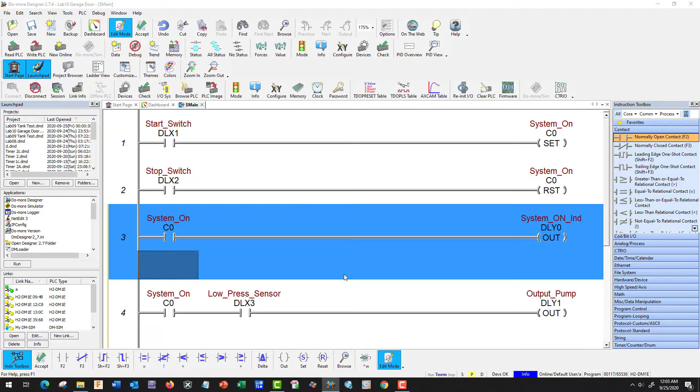Okay, so that's our output pump. So let's just document that. Tools, comment editor. Okay, this is going to be our output pump. That just helps us identify this, and other people following behind us could do it.

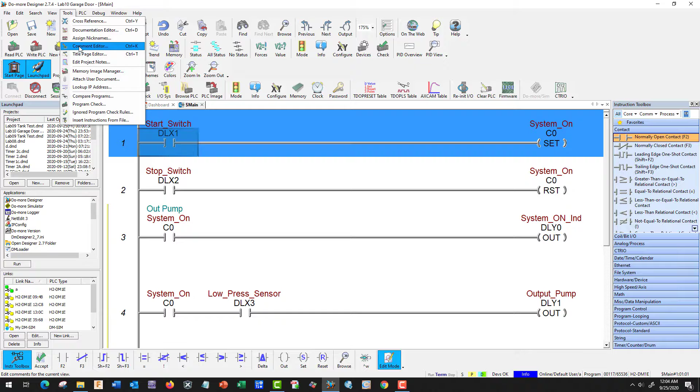Alright, and maybe we'll go ahead and just put a comment above this one. Tools, comment editor. I'll just put system on. Good. Alright, let's go take care of our

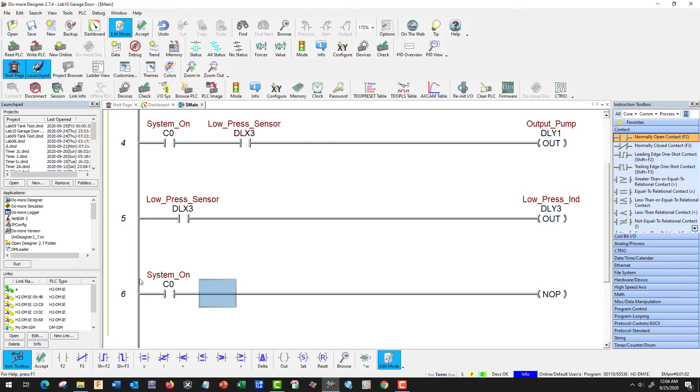input pump. Alrighty, so our input pump should come on if the system coil is running and the tank low level sensor is on. Okay, so let's do our C0 system coil, and we need the low level sensor, which is DLX4. And if you notice, all the inputs are X's and the outputs are Y's. Low level sensor, good. And we're going to turn on our input pump, which is DLY2. And it should be populated with an input pump.

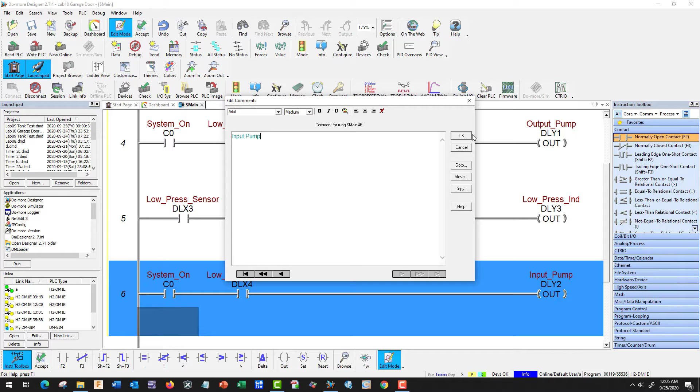Okay, so why don't we just document that too. Okay, beautiful. Okay, so it should stay on until the water level reaches the high level sensor. So let's go ahead, and if the system's on, the low level sensor's off, let's just go ahead and kill it when we get a high level sensor. DLX5, high level sensor.

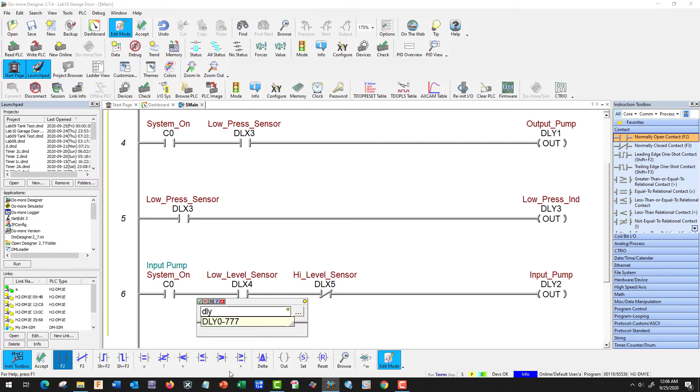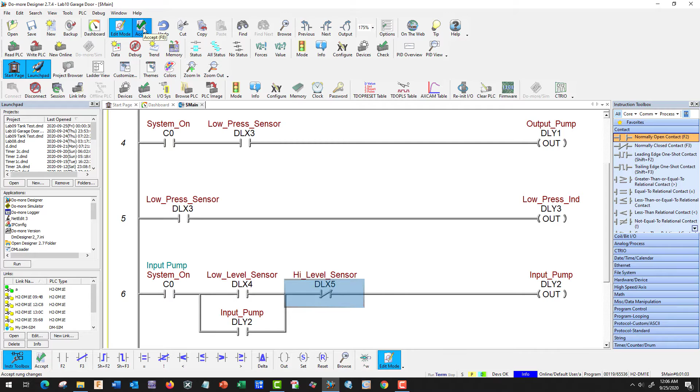Okay, so if our system's on, we got low level. Okay, so let's go ahead and seal around our low level sensor with a DLY2. See if that helps us. DLY, yeah, 2. And that way we could just go ahead and clear that low level sensor, assuming it goes past it, and we'll try that. Let's go ahead and save. And write to our PLC. Just for grins. Okay.

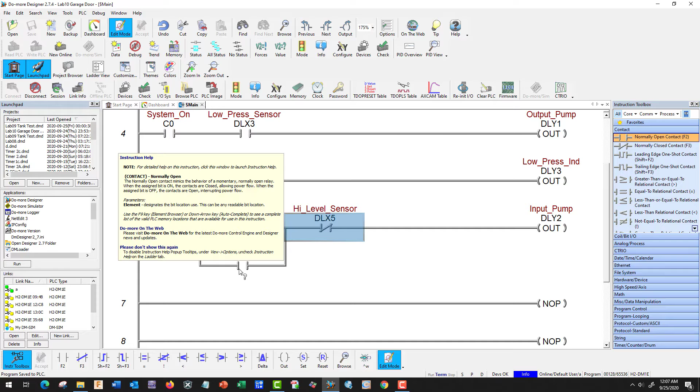And we have one more. Our extreme low level sensor. So our extreme low sensor indicator, DLY6, should light whenever the low level sensor is activated. Alrighty, so let's go ahead and put our DLY6. Okay, and we're going to put two things here because I want to start a timer, because it also said if it goes on for 5 minutes we need to kill the output pump.

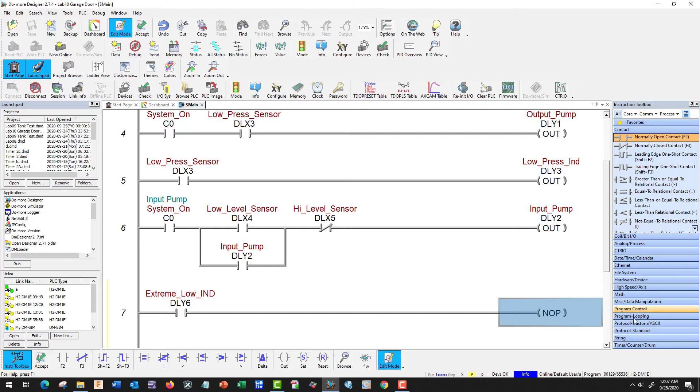Okay, so let's go ahead and put our standard timer here. We're going to go all the way down to our timer drum. Use just a plain old standard timer. And I think we're supposed to use 5 seconds. Yeah, that's reasonable. Any more than that, we have to wait too long. Okay.

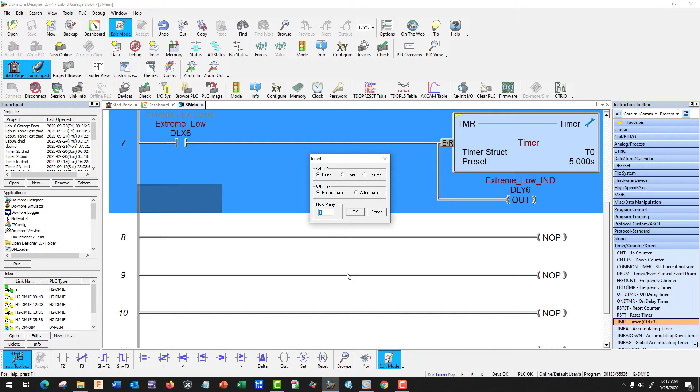Okay, I tried our operator terminal and we have some issues, so I need to fix some things that I left out. So this is a good opportunity to show you how to do some changes. So we're going to click on 7, and I'm going to go to Edit, and Insert, and we want to insert a rung before cursor. And actually I need two because I missed two things. Okay, so that's going to insert a rung in between those where I want them to be.

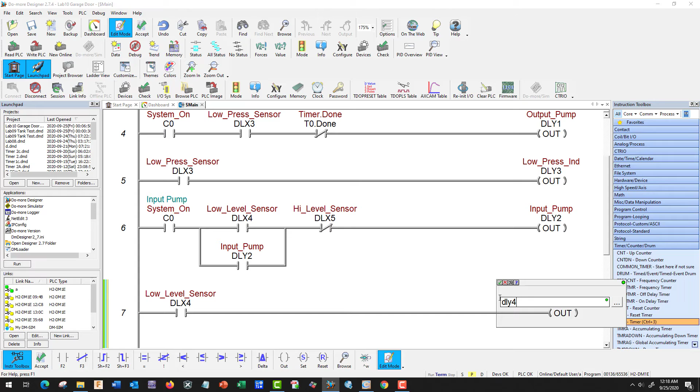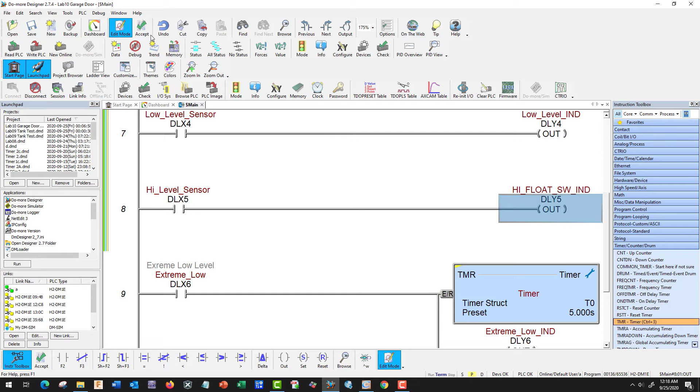So what I forgot was a low level indicator, so we're going to do a DLX4, and we're going to use our DLY4 output. And there's our low level indicator, and let's use our high level indicator, DLX5. And DLY5. Okay, and we could delete rungs and insert space in between. So let's accept, write, okay, save. Let's turn on our status, and let's go back to run mode where I turned it off. Okay, let's try that now.

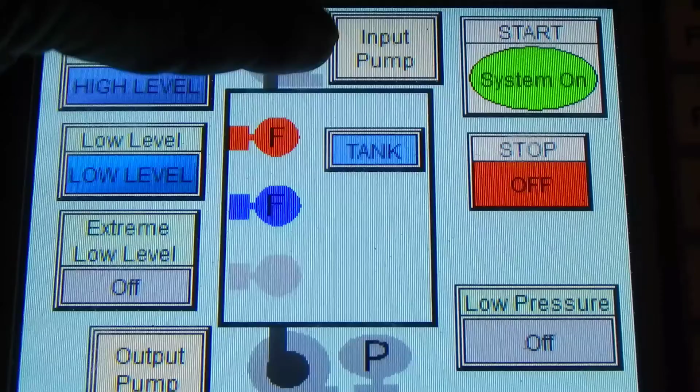Okay, here we have our operator terminal, and we're going to test our program and our screen. So first we're going to turn on our system start, and that looks good. So let's turn it off. That works. Back on. Okay, so we have our control relay on. So let's go ahead and turn on our low level. We got our input pump on. Good. Now we're full. And now our pump's off. Good. So let's just turn those off. Get out of there. Okay.

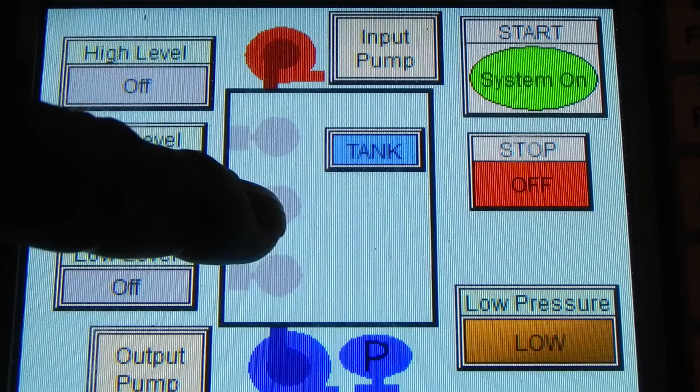Now let's turn our low pressure pump on. Good. So we have low pressure and our output pump is on. So our city's getting water. Alright, now our tank just went low and we're going to start pumping dirt. So let's see if in 5 seconds our pump shuts down. And it does. So it looks like it's working perfectly. So let's turn off our low pressure switch. Yep, and our indicator's off.

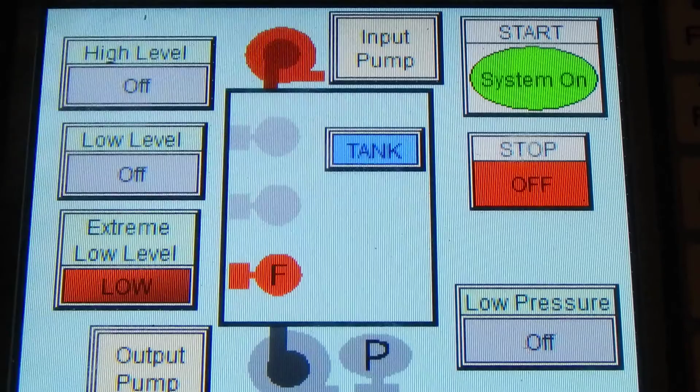Okay, I noticed a little glitch on our OIT screen. The input pump was not turning off when I released the low level sensor. That's a problem, and that's because I sealed around here. I'm not sure why I did that. It's not in my notes, but let's get rid of it. And we're going to do a control right arrow, a shift control left arrow, shift control up arrow, and let's go over and a shift control down arrow. So we got rid of the problem, and it will work now.